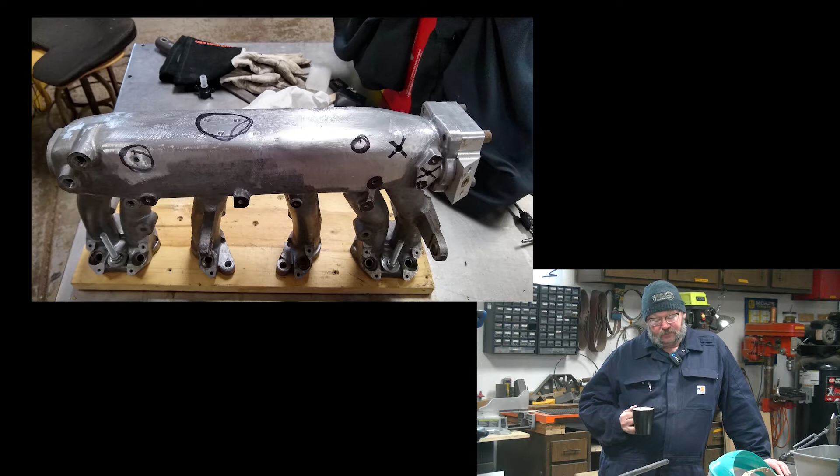I have a couple of examples here. One of them is, as we mentioned, for a friend of the channel, Jay, and his pretty Z car Zoe. And he says, "I have some holes in a cast aluminum intake manifold, and I need those holes plugged up." Easy if you know what you're doing. At that point in time, I had no idea. I had seen this done. I had not actually done this.

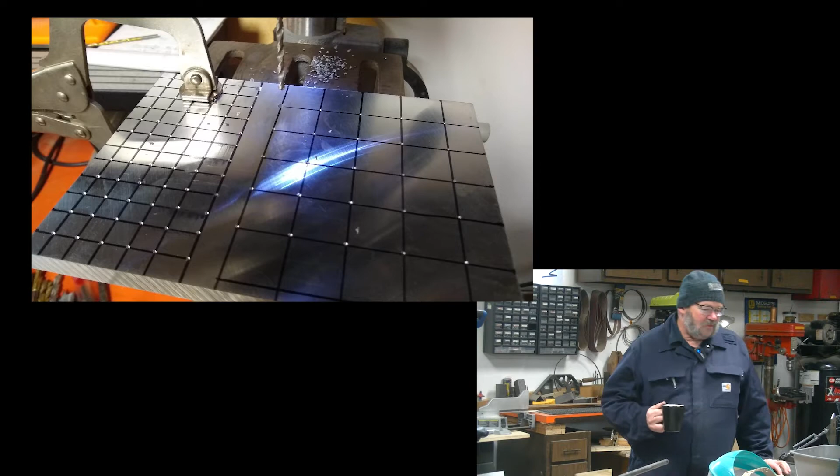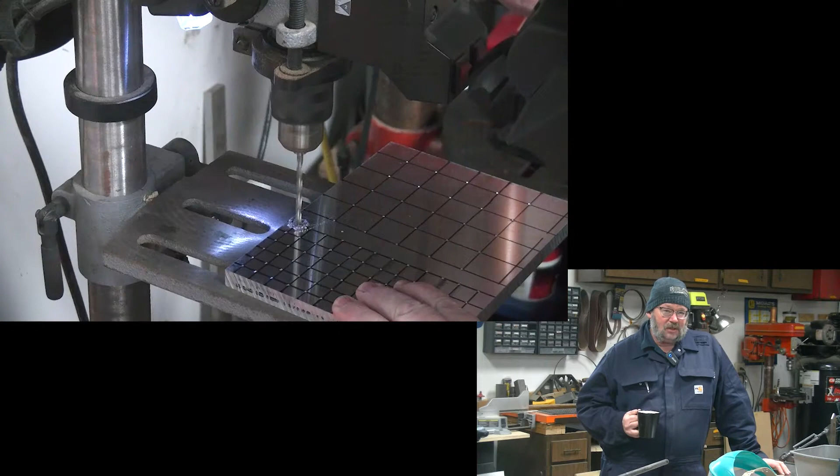So, the informal way of gaining this new skill that someone needed me to do, in my mind, first thing I had to do is I had to figure out the process. And to figure out the process, I needed a practice piece. So I found a piece of 1/2-inch thick aluminum, and I drilled a series of holes in this plate. Some are little tiny holes, and some are bigger holes, approximately the size of the holes that needed to be filled on the aforementioned manifold.

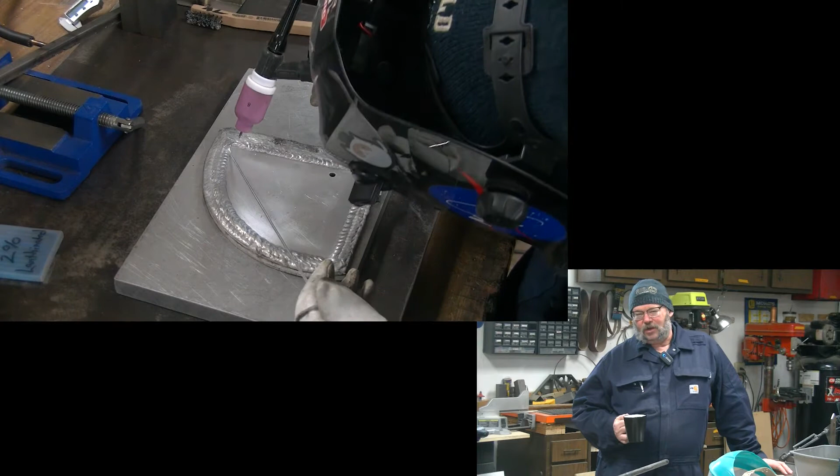So we get this plate made, and then the fun part starts. Well, it's aluminum, so aluminum, you have to weld it on AC. So we get some practice welding AC on the TIG welder. The problem is getting your weld nugget down inside this hole. And there's a learning curve to that.

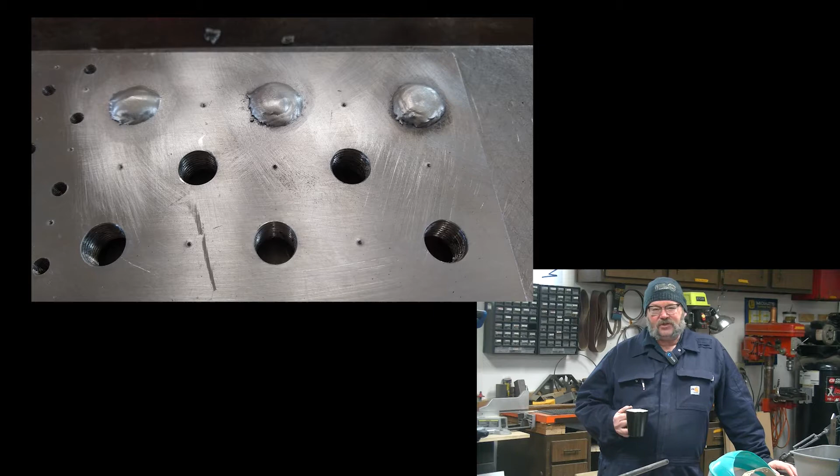And so it took a day of sitting down, and part of it is going to what I call YouTube University, or the Academy of Social Media, or the interwebs, the intelligentsia interwebicus, and trying to see people who have done this and the techniques that are involved in that.

And part of that has to do with the angle that you're doing this at. Part of it has to do with how far you can get your tungsten to stick out. Part of it has to do with the flow and the gas that you can get down in there. The amperage that you need to do that at.

A little trick that I had learned was to cut up little pieces of filler metal and to put those down in the hole, and you can use those to kind of start a puddle, and then you can build up upon that. So the intake that was in question originally started out looking like this. We made our practice plate, and then we gained a new skill by filling these holes up.

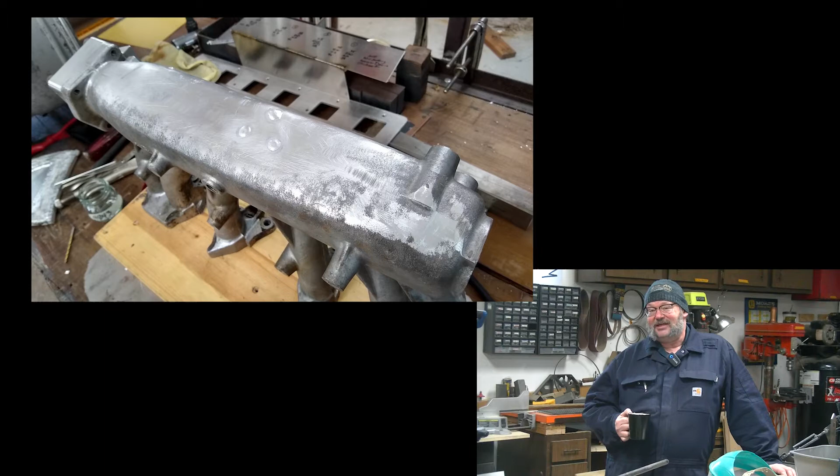We got to discover how nasty cast aluminum can be, especially cast aluminum that has been in an engine compartment for a number of years. So that's one way that you can gain a skill, is somebody says something and you don't necessarily know how to do it, but you may be the only resource that that person has at the time.

And so you use your cranium to figure out how to do that skill and then apply that skill for someone who needs some help. Now, there's another way, and I just call them projects. I have this miraculous thing in my pocket, the wonderful pocket computer, that I can access a majority of the world's knowledge. It's in my pocket.

I mean, it's amazing. And you'll be looking at something, you'll see a little short video clip. Usually they're sped up of somebody making something. And so I saw one of those and I went, I wonder how to do that.

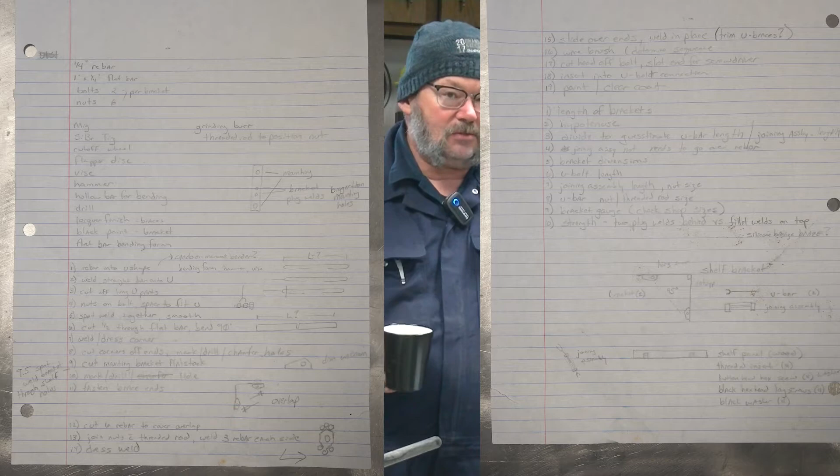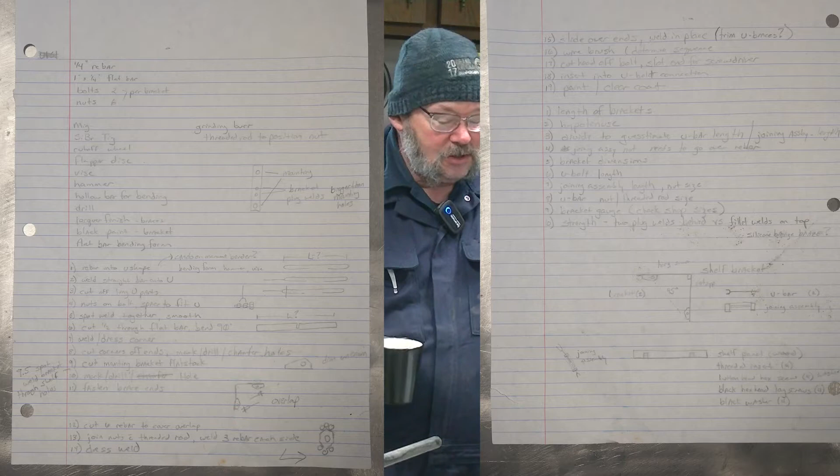It's a bracket. I don't need a bracket. I've got piles of brackets around here, but they did it in a way that I thought was interesting, and that would give me some fabrication experience in my shop at very little cost, because all of this stuff I just had laying around the shop.

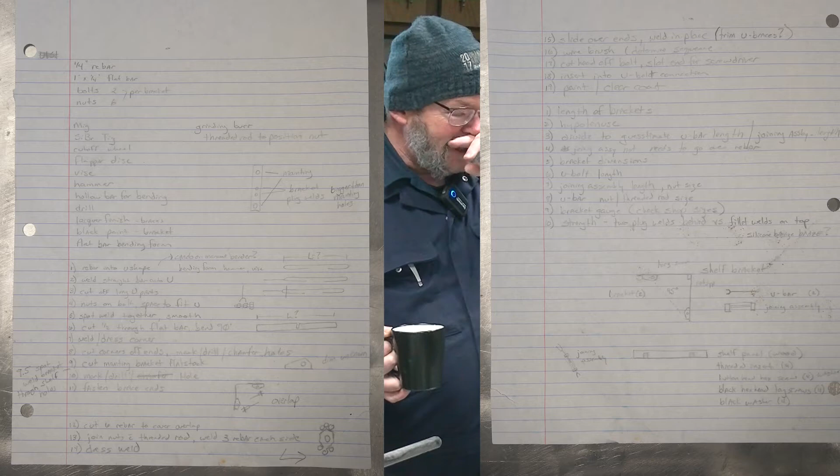So other than my time and a runny nose, because it's cold in here, that's what I had invested in this. So I went through, figured out the supplies I needed, figured out the equipment I needed, and kind of gathered that up.

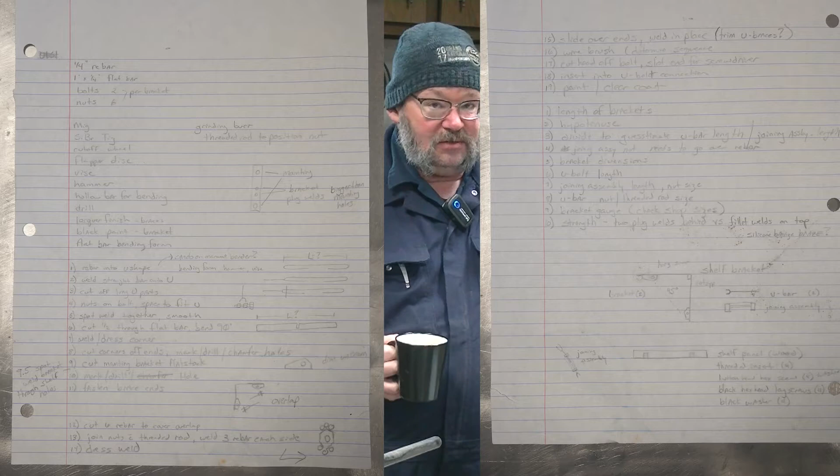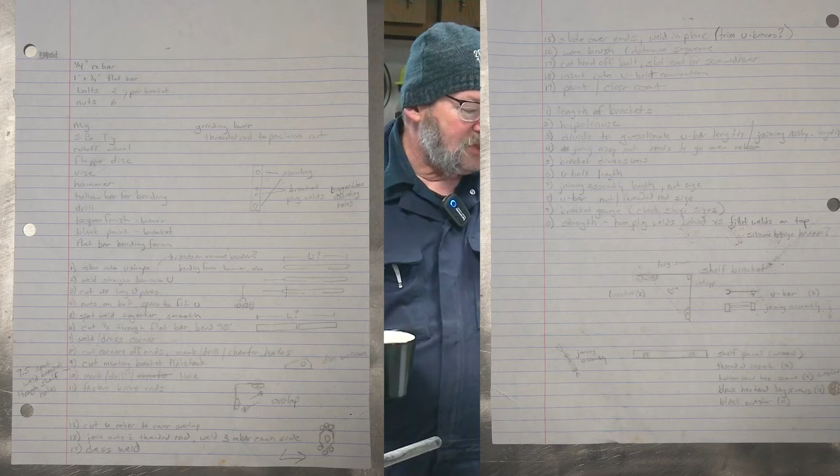And then I started doing some reverse engineering, figuring it out with the materials that I had. There were some things I saw that I thought, that's kind of interesting. And then there were some things I saw where I was kind of like, I don't know about that. Through that process, I was able to come up with this.

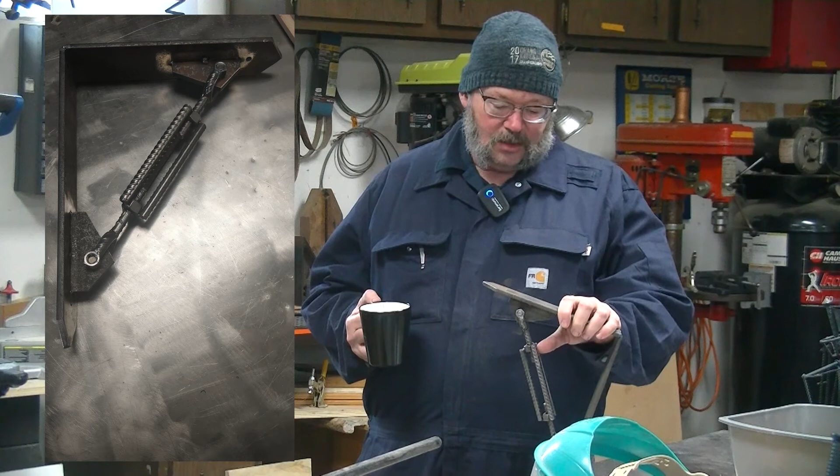Now, this is not the completed object. This is, again, an exercise to see, could I make this happen? If I was going to make this happen, how would I make it happen? What changes would I have made?

As you can see, or maybe not see, these are just tack welded on here because I'm looking at position. This has a hole to fixate the shelf on top of it, and there is currently only one hole to affix it to the wall. There's not another hole to affix it to the wall, so obviously that's not a functional shelf yet.

I started this using a MIG welder just to do some little tiny spot welds, and that ran out of gas. Then the next day when I was using a TIG welder to do some more, well, that ran out of gas too. So lucky me, I got to take two tanks to the welding supply store, who was more than happy to take all the money I had in my pocket and just a little bit more.

And so this got me thinking, how do I, first of all structurally, make this so that it does what it's supposed to do? It supports, let's just say this bookshelf is going to hold, I don't know, books. So is my design going to support books?

And if the structural aspect is satisfied, then we go on to the aesthetic purpose. Does it look appealing? I don't know. People might look at this and think it's hideous, and that's fine.

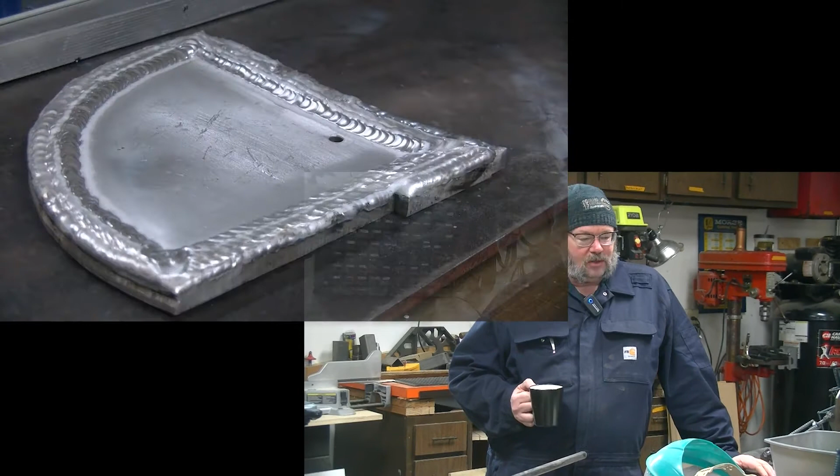And there are a number of things like that here around the shop. This is another aluminum plate that, if I'm having to weld aluminum, I use as just a practice plate, just to kind of get my muscle memory up and going, trying to get into the groove.

I don't know about you guys, it takes a while to get me warmed up because I'm a million years old. So I find for me personally that if I'm going to do any kind of welding, I try to get warmed up. I try to lay some beads down in a material that is the same type, close to the same thickness, so I can get my settings right.

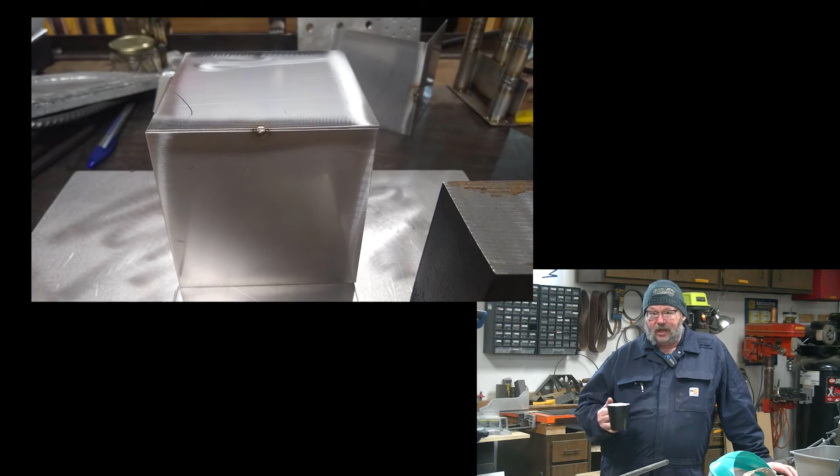This is a box that I thought I would build. First of all, I had to fabricate this, and my sheet metal tools here in the shop are not great. I have this chintzy piece-of-junk bender from Harbor Freight. Works really good bending aluminum foil, and other than that it's kind of suspect.

But I was able to construct the blanks to build this box to practice my stainless steel welding on an outside corner. The plan is eventually to just cover that whole box with welds that I would use to get warmed up before going to weld something else.

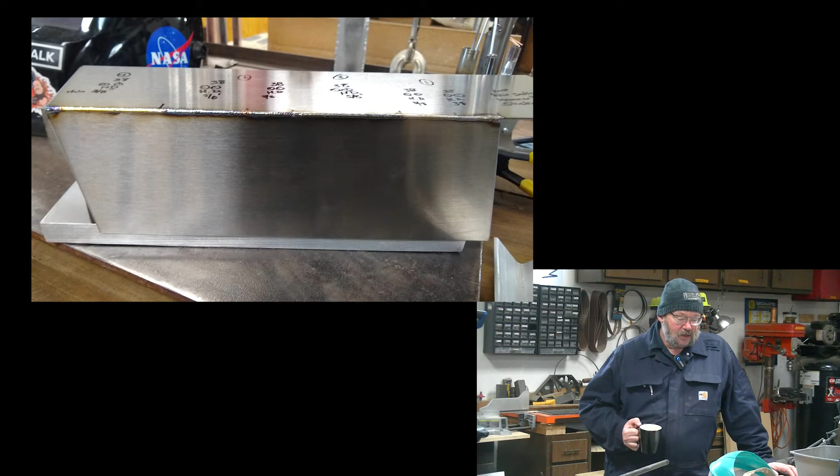This is a project from when I first got my Primeweld, an AC/DC 225. I wanted to know what the different settings would do, so I found these two pieces of stainless left over from an art project that I did.

I sat down and annotated all of my settings on there to see what they would do, and to see, do I like the way this looks? Are they structural? Am I getting penetration? Is this a solid weld? Or is this just a pretty, Insta-snap weld for people to ooh and ah over?

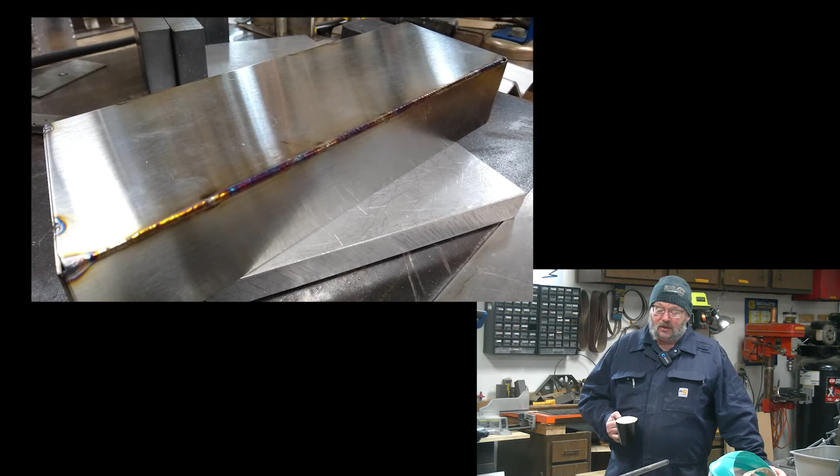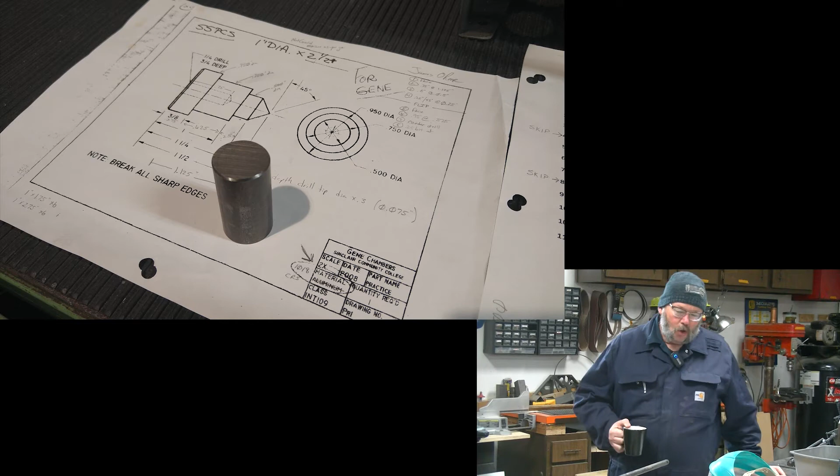Those are ways that you can gain a skill that you may not currently have, and sometimes you can actually make something out of it. It's the same principle as what we're doing in the formal education track that I'm in right now. We make widgets - they call them different things, like a lathe widget or a hole drilling widget.

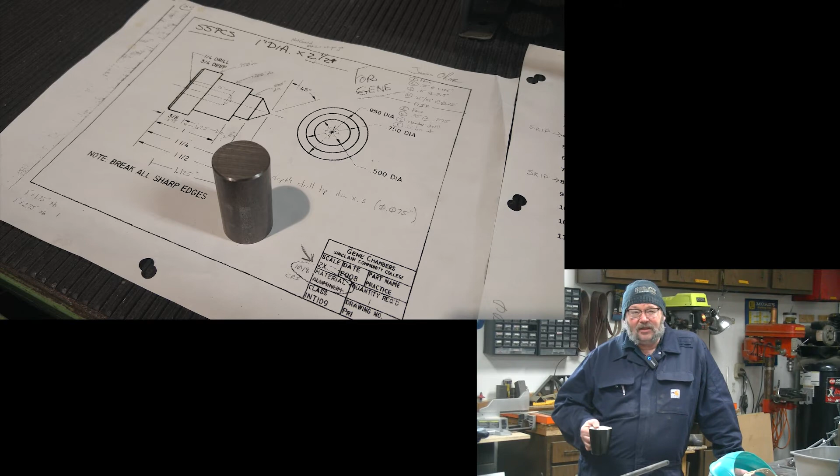There are little things that you make in order to gain those skills. You don't have to be in a formal shop program to do those kinds of exercises. If you use the Googly machine and look for welding skill projects, machine shop skill projects, or lathe skill projects, you're going to find all kinds of stuff where you're given a set of dimensions, and the purpose is not to make the widget. That's not the end product - nobody wants a bench full of widgets.

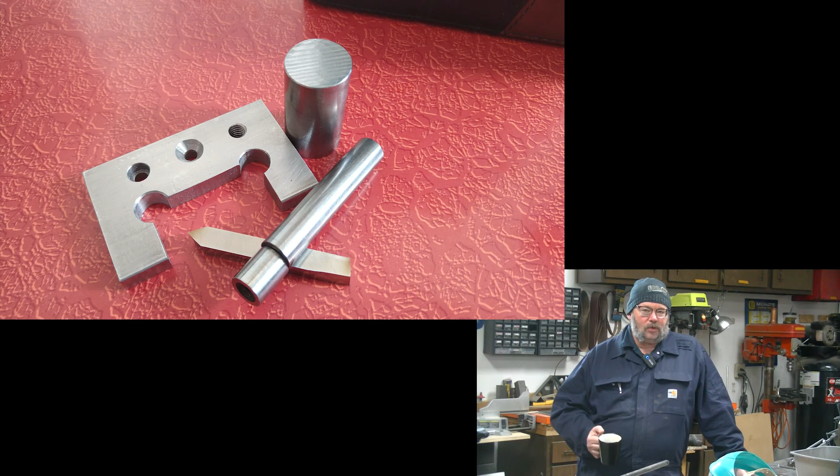What you're after is the journey. Can you turn this piece from a rough 1-inch stock down to 750 thousandths, plus or minus 2/10, and then step that down to a 1/2 inch part, plus or minus 2/10, that's a 1/2 inch long, plus or minus? Can you make a cone on the end of this to a 45-degree angle, plus or minus? When you're done, it's not the lathe widget you want - it's the ability to explore a skill, hone a skill, understand the process.

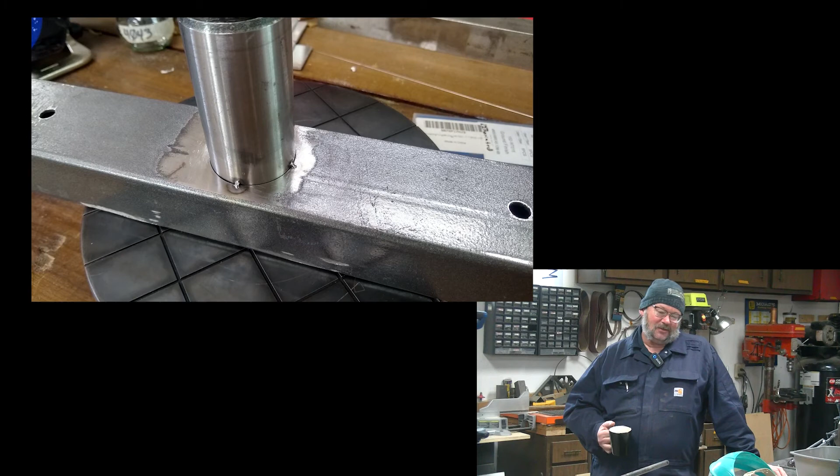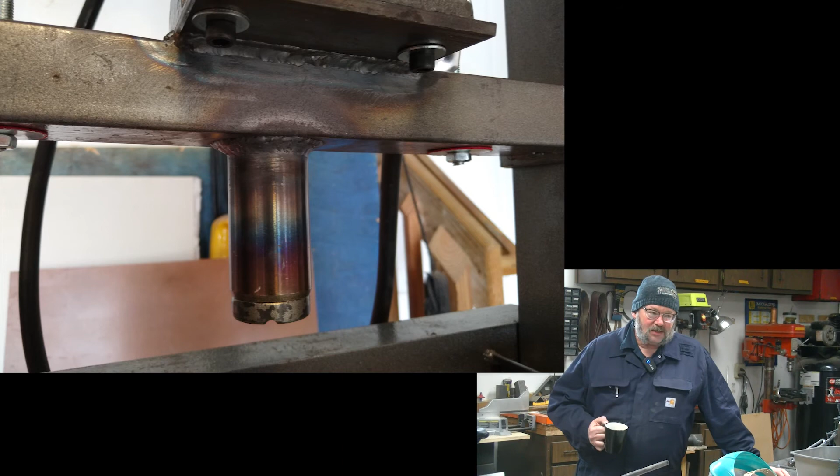That's what informal skill training is all about. It can be triggered by a guy who has a project and needs something done, and you can have all kinds of skill experiences working on parts, gas tanks, intake manifolds. We made a press part to go on his hydraulic press so he could do something on the car - had no idea how to do that. One of the very first projects I ever did welding-wise was for a friend of the channel, Jay, and we were off to the races, so to speak.

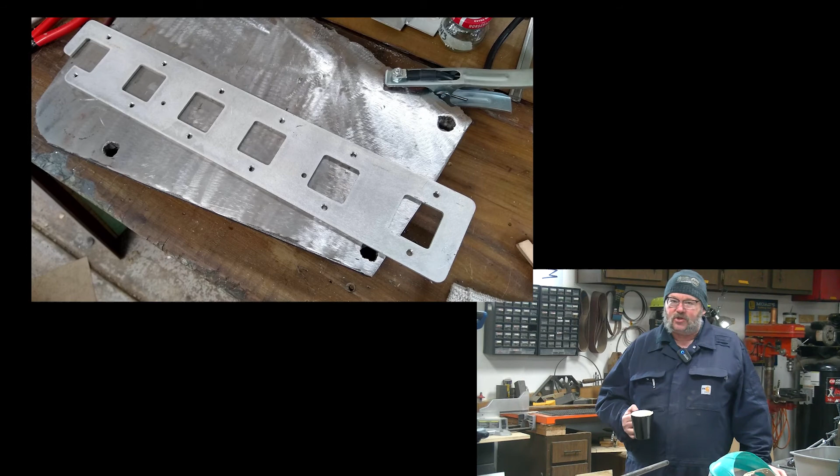So anyways, you're limited partially by your imagination, and you're limited partially by the tools you have on hand. Don't be discouraged if you need to make something circular and you don't have a lathe - there may be the possibility that you can chuck that up in the drill press and do it. Maybe, I don't know.

Don't be afraid to go onto the googly machine and start looking for alternative shop processes. There are some very skilled people making all kinds of stuff on the interwebs, and you can gain skills. You might not necessarily need to make a latch for your backyard gate, because you may not have a backyard or a gate or any use for that. But if there's a way they're joining two pieces of metal, two pieces of wood, or a piece of wood and metal together, you can file that away and use it at a later date.

Anyway, we've rambled on too long. The coffee's getting cold. It's RATTLECAN Fab Shop.

Keep chasing those skills, because in my mind, the day you stop learning, that's the day you start dying. I'm not ready to die. Hey, if I can do it, you can do it.